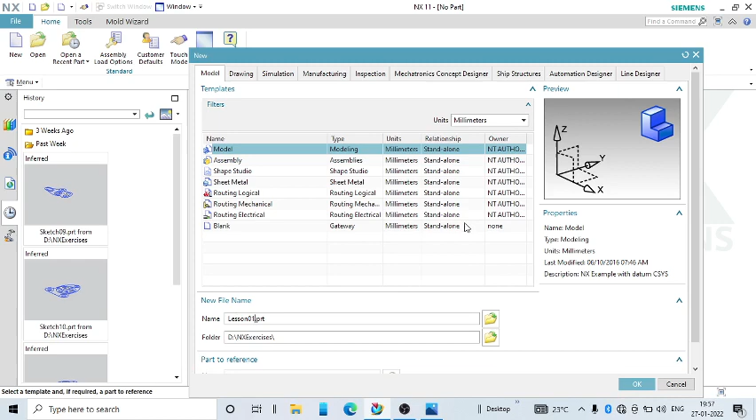Let us start. Go to new and let us save as lesson 1. Let it be there only, no problem. Then okay. So we will go like this. First, we are going to make a sketch, then select the extrude option. We can go here, sketch, and select the required plane, then okay.

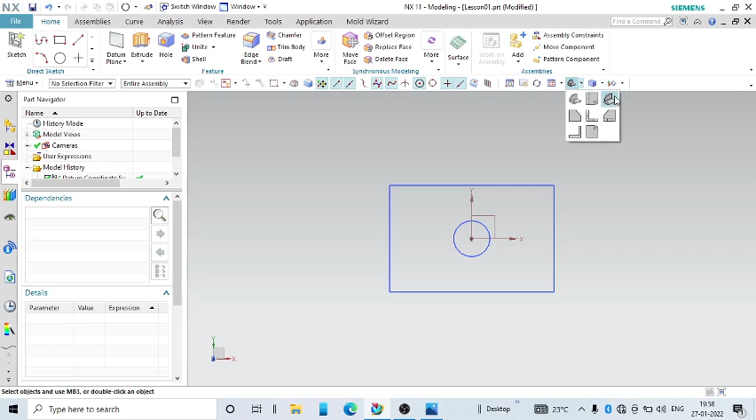Then we can make a sketch. Let us say I'm going to make a rectangle, say center rectangle, selecting the point, then drawing this rectangle. Then I want to add one more loop inside this, let us say a circle, symbol profile. Then finish sketch. So to get the trimetric or isometric view, we can select this isometric.

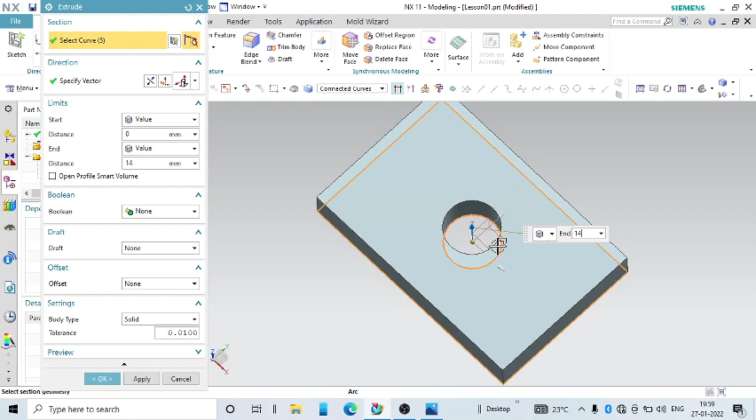The first option, you can go here, extrude, and select the loop. Let us say this particular option. You can select like this, or you can select this like this, one by one. Or you can press the control key and select this to remove, I think shift key. So we can do like this. This is one option. So I'm not going to do that.

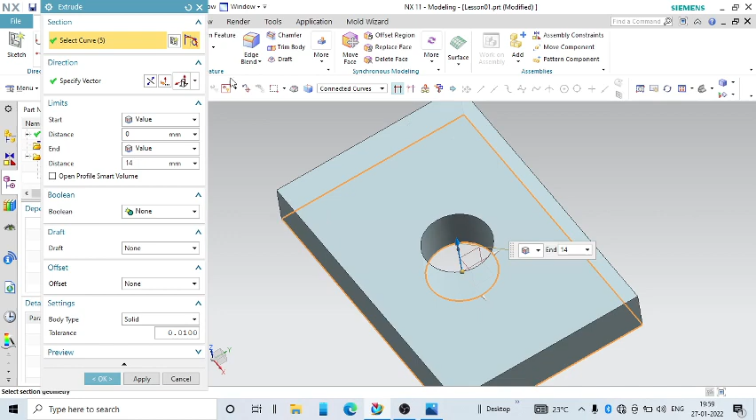Next option is you select the sketch, then go for extrude. Automatically the closed sketch, it will select the island and automatically make the profile. This is one option. Let us delete the sketch. I want to delete this. Delete.

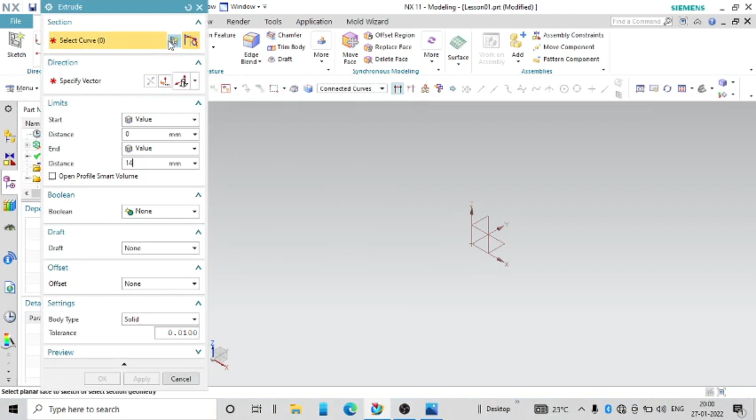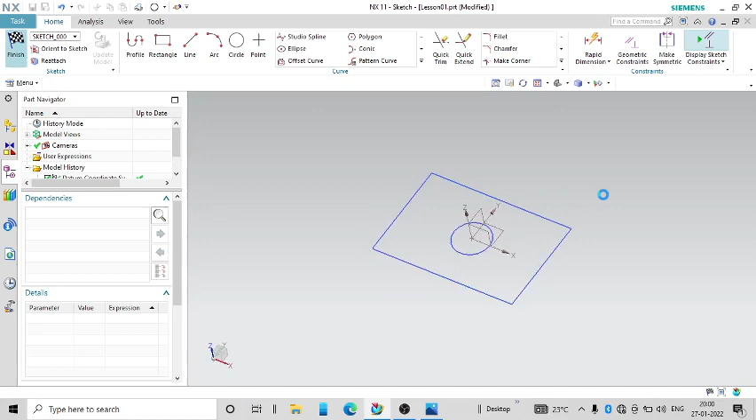Next option is you go inside the extrude command, extrude. Here, sketch section, you select the sketch section, then select the required plane, then okay. Then you make the same sketch. I am going to make the same profile, so here like this. Then okay, then finish. Automatically it is selecting like this. If you want to remove the selection, you can press the shift key and remove this, then select, or shift and select like this.

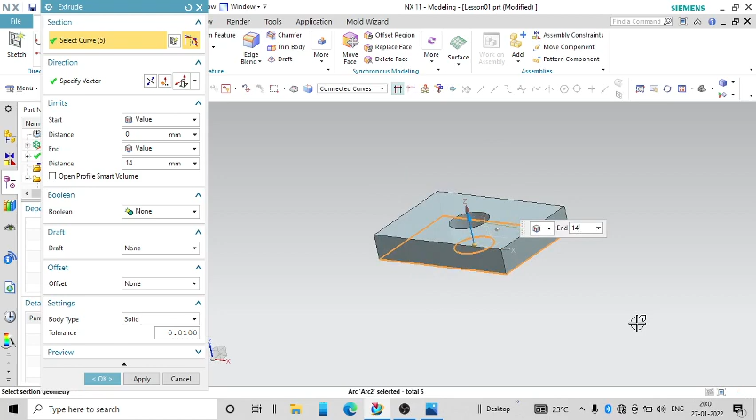So these are the three options. First of all, okay, cancel, yes. So let me delete this also.

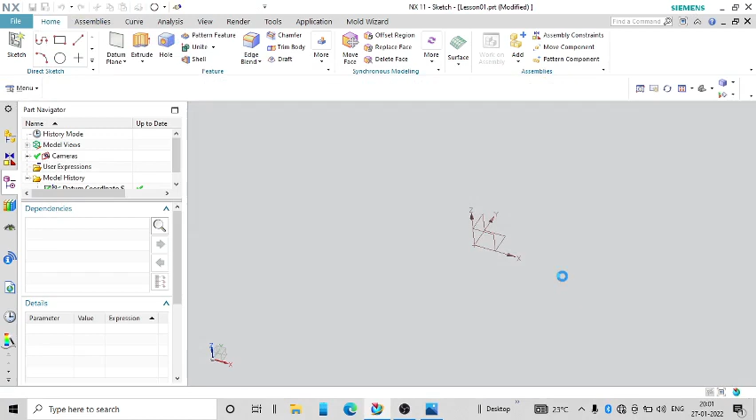Next, what we are going to do is we have to learn these limits: start value, end value, symmetric value, what it is. We have already covered the first and second. Third is in the extrude we have limits. Let us say go for extrude, sketch section, select the required plane, then OK. Then let us make the rectangle, simple rectangle here. The size is OK for us. Finish.

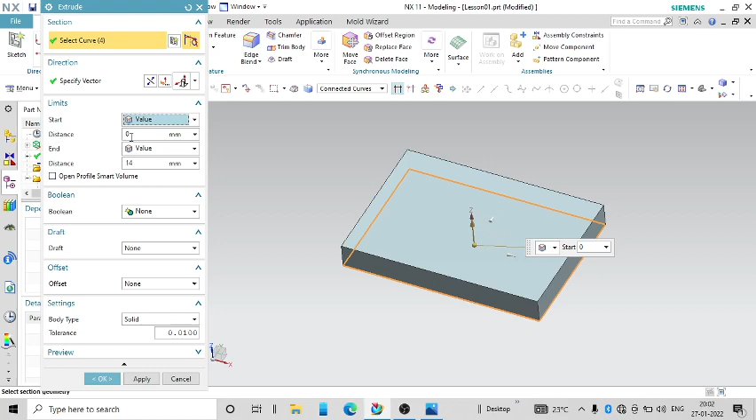Now you can see here the start value. If you check here we have value and symmetric value. First let us go for value. If I give the value, you can see start, here you have to define the distance. You can see the arrow here, so if you want to pull like this, you can change the direction. This direction is OK. Now I want to give some value here, let us say 15. So now from the sketching plane it got shifted 15 mm on the other side. To get the 15 value, I have to give a negative value here.

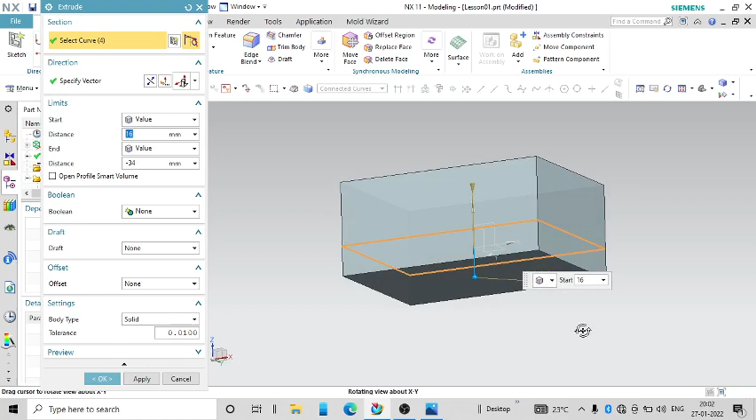Similarly, if I drag this, I can modify like this. If I pull this one back, I can do like this. You can see this value is negative now. So according to your requirement, you can modify this value. This is the start and end values. Let us say if I go for symmetric value, automatically it will maintain both sides equal, meaning from the sketching plane 12 mm here and 12 mm here. Okay.

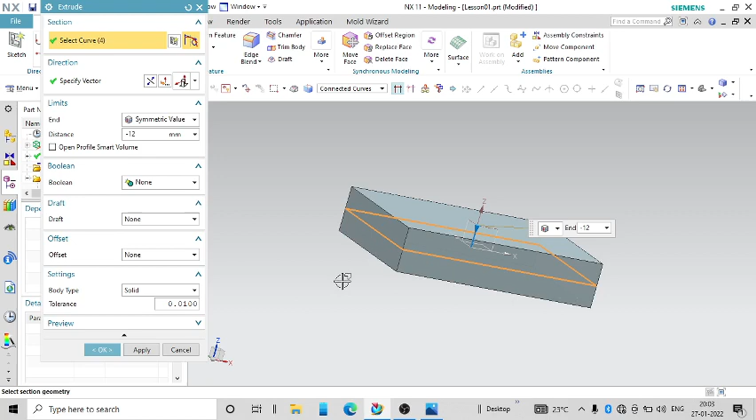Now that part is over. So if I go for the 'again' value, I can change it for the next exercise. I want to change this a little bit. Let's say 20, let's say like this.

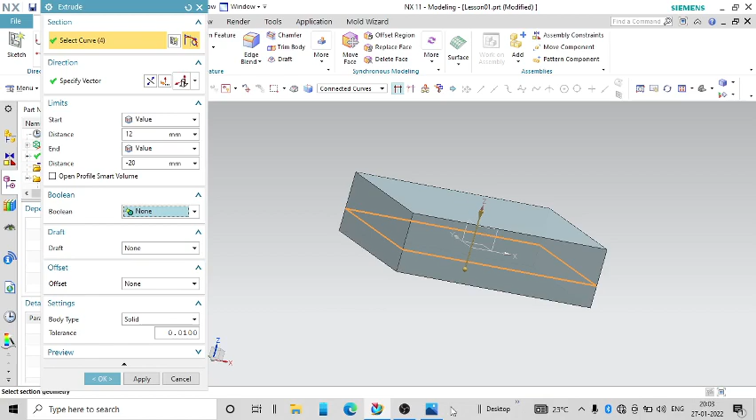Now, Boolean operation I am not going into because here there is not much use for this Boolean. Next thing, let us go here. So limits we have seen: start value, symmetric value, end value. Symmetric value is for giving the extrude upside and downside the same value, while start value you can give one dimension and end value another dimension.

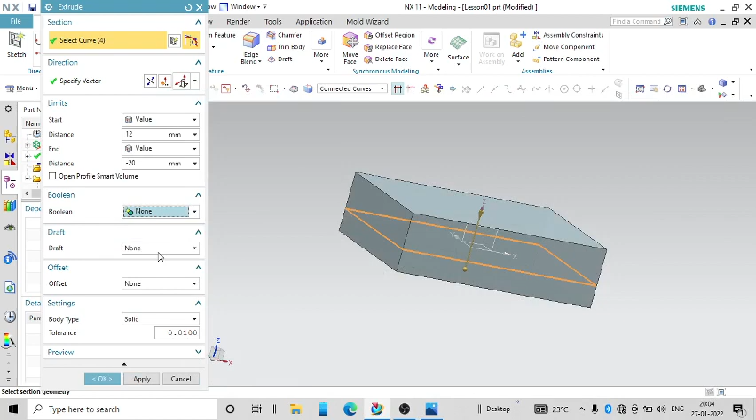Next is draft. If I go here, draft by default is none. Okay, let's say I want to give some draft here. So I can select - sorry, not here - I can select this from start limit.

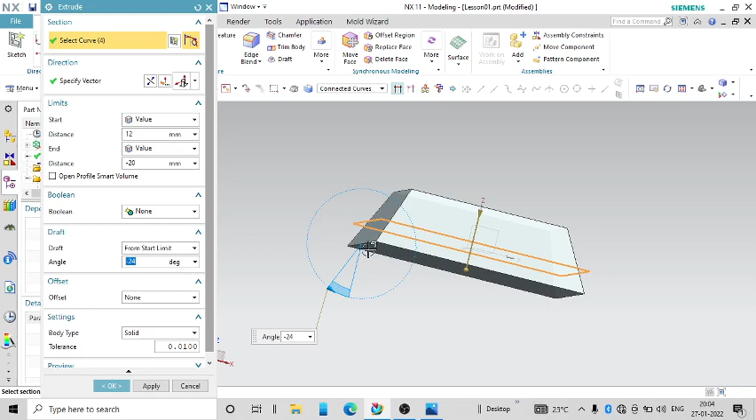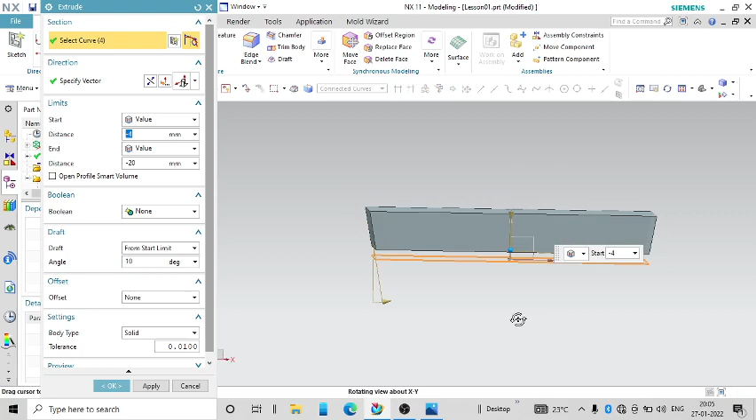From start limit means, you can see here, this is considered as the start limit. From there you can adjust the angular value to any required dimension. So wherever the profile starts, from there it will adjust. If I adjust this, let's orient it and see it from the front. You can see from this point, wherever the profile starts, from there it is maintaining the angle.

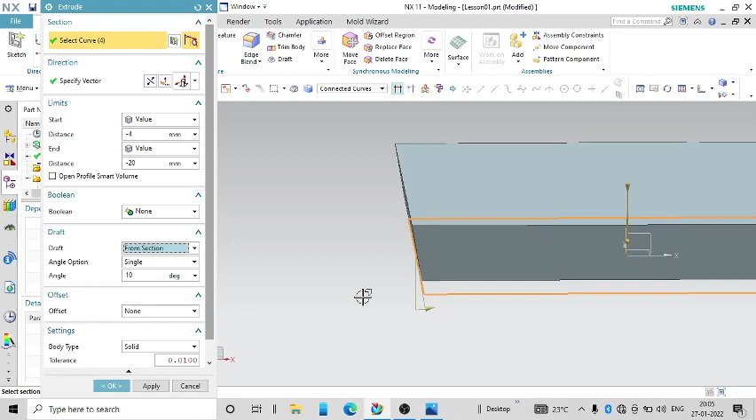That is the first one. If I change this to 'from section', what happens? Here, the sketch end is considered as the starting point, and from there it is maintaining the angle. If I drag this out, you can see again that the sketch section is considered as the starting point, and from there it is maintaining.

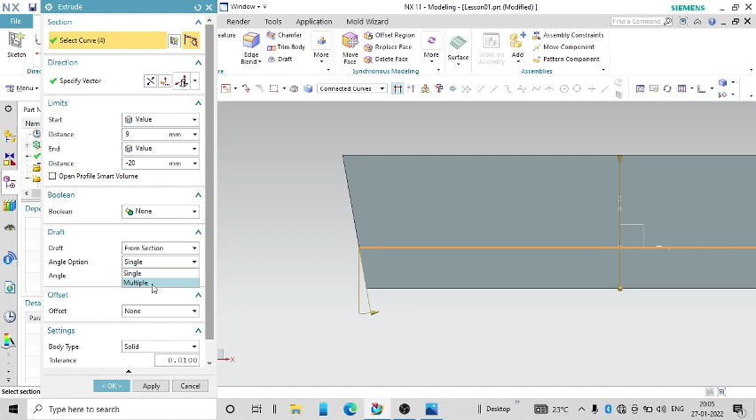Next, here I have options called single and multiple. If I select multiple, now I can define different angles. Say this face I want one angle, this face another angle, here some other angle like this, and here another angle like this. So I can give different angle values on each face.

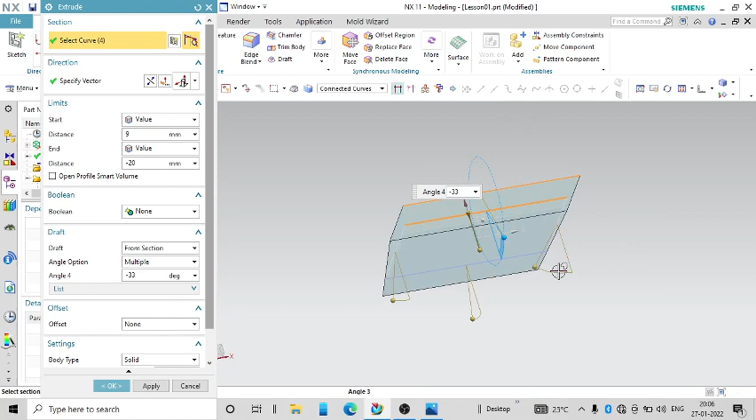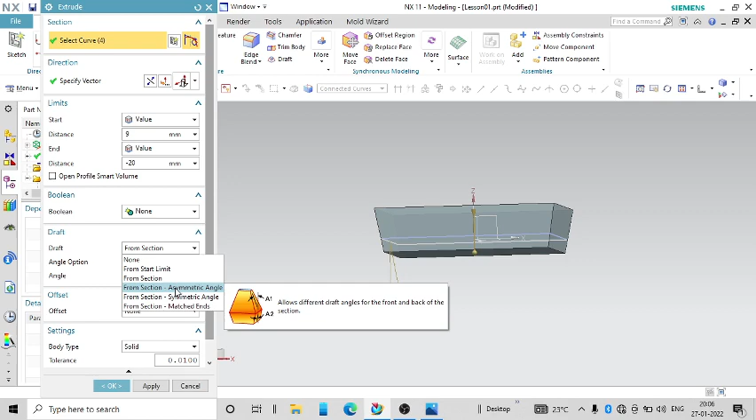This is the use of it. Please see that all the angles are starting from the section - okay, I don't want that. Let me go to single, then from 'from section' I am going to change to 'from section asymmetric angle'. What does that mean? If I go to asymmetric angle, I can give one angle on this side and another angle on this side. Remember that it is taking the sketch section as the origin point.

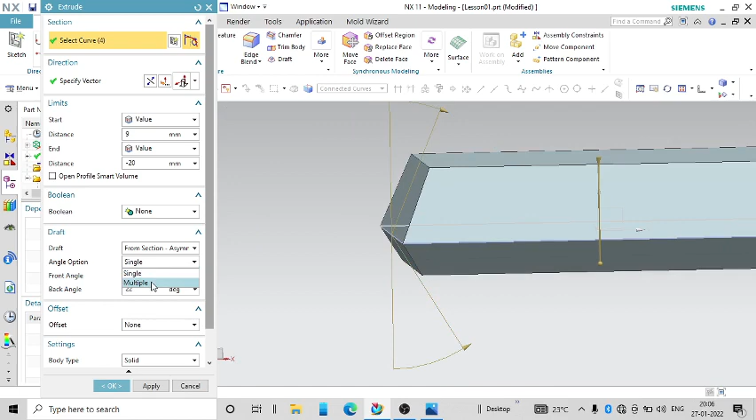Same thing I can do for multiple also. If I select multiple, you can see I can add one angle here, another angle here, and similarly on the other faces as well. So the angle can go on either side, need not be the same side, can be any side, but for the purpose of demonstration I am showing everything on one side.

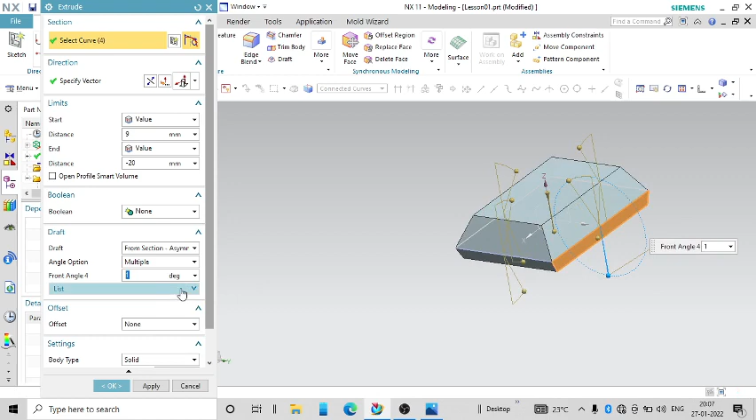So here you can see asymmetric angle and multiple. Let's see the next option, symmetric angle. Symmetric angle means only one angle you can define - whatever value you define, that will be considered as the angle value. If I give 15, it will maintain that.

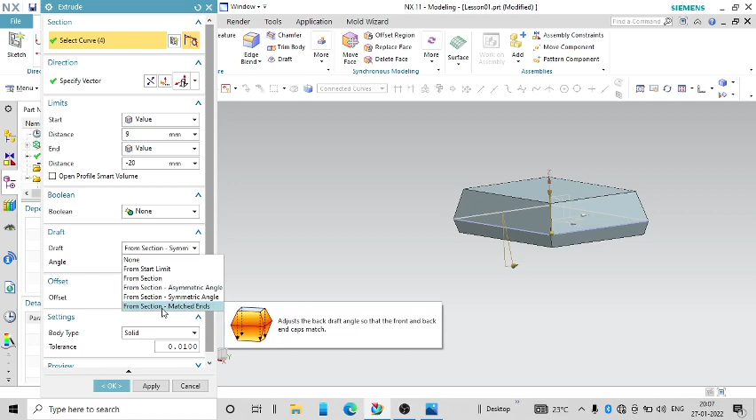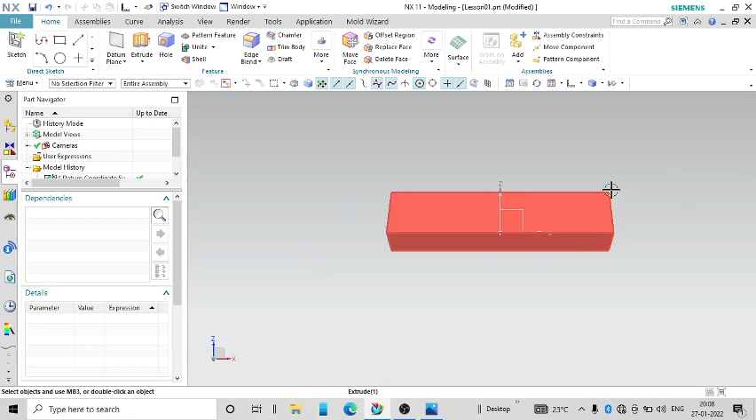Now one more option: from section matched ends. This means the top edge and the bottom edge will have the same dimension. Let me click OK. Now if I see the front view, you can see that this point and this point will lie on the same line - if I draw a line, this end point and this end point will align.

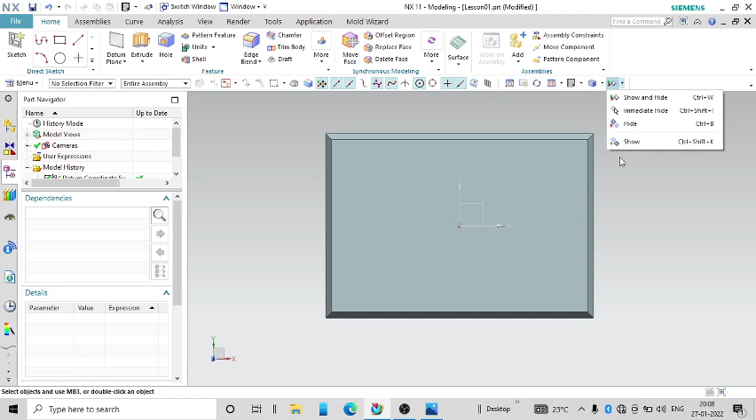Similarly on any side, if you check, it will be correct. Let's see the top view, and let's change the shading to wireframe. If I see the wireframe, I am not able to see any line outside this. Let's change the value and see what happens.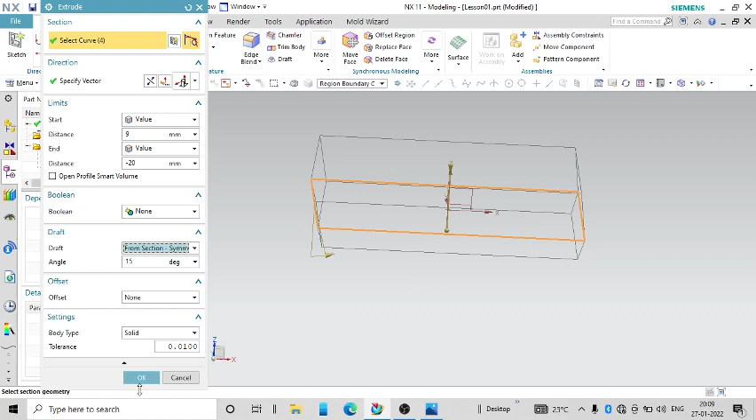Let me go here, extrude, edit parameters, and change this to symmetric angle. Let me change it and click OK. Now let's see the top view - you can see one line is passing through this edge, another one here. Similarly, if I check the front view, you can see this is far away from this corner. Okay, let's make it shaded with edges.

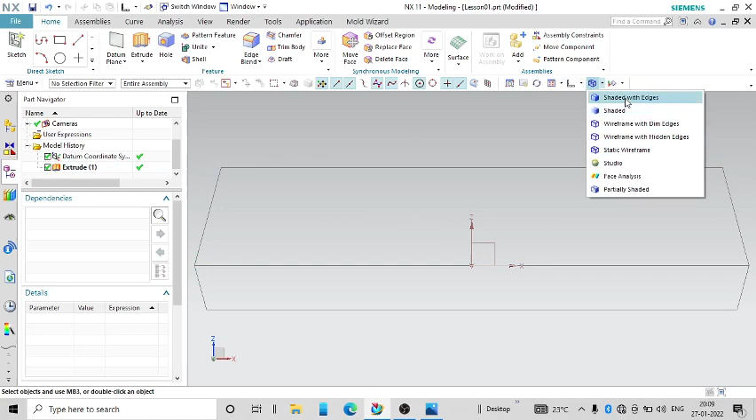So that portion is also over. Angle options, all things I have explained. Now offset - two-sided symmetric, that is also there. Let's go here, edit parameters, next offset. Okay, let's remove the angle for the time being.

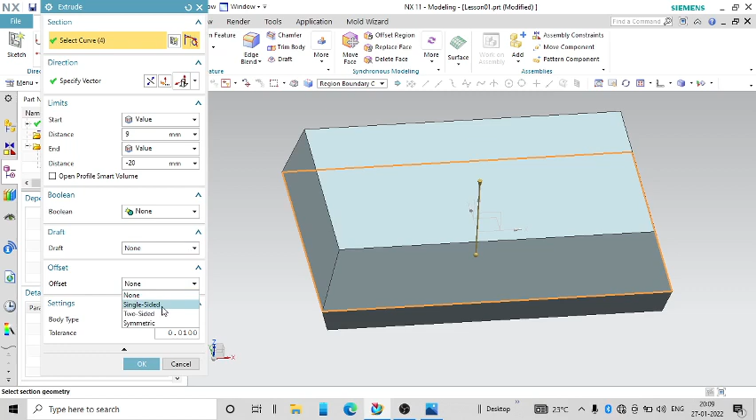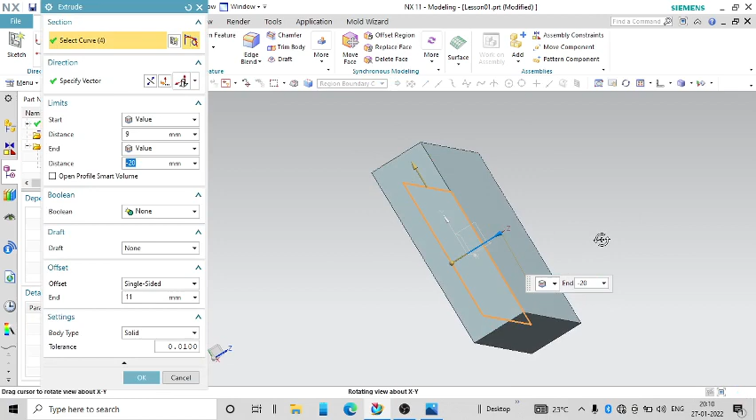Now go here, offset, single-sided. So how much value you can give here. Let us see, okay. That means your sketch is somewhere else. If you see the edit parameters, your sketch is inside. So whatever value you have given, it's okay. Now it is clear.

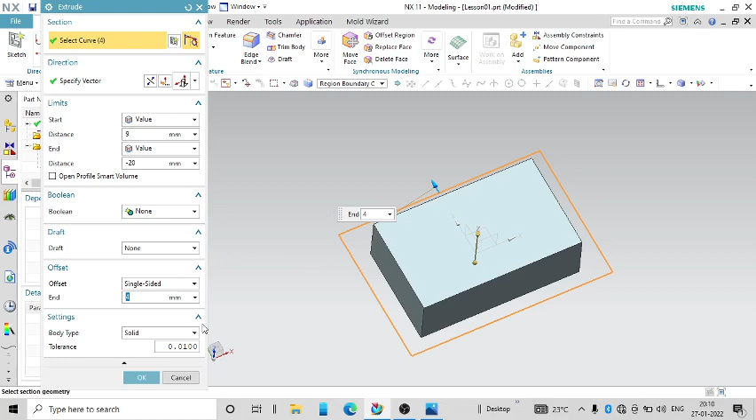So your sketch is somewhere outside, but you can adjust the profile if the value is symmetric. Now from single-sided, if I change to two-sided, I can again adjust two values, one here, another here. So you can see that.

That is the offset. Again, edit parameters. Now from two-sided, if I want to make it symmetry, that is also possible. 4 mm, here you can enter the value. So that's it.

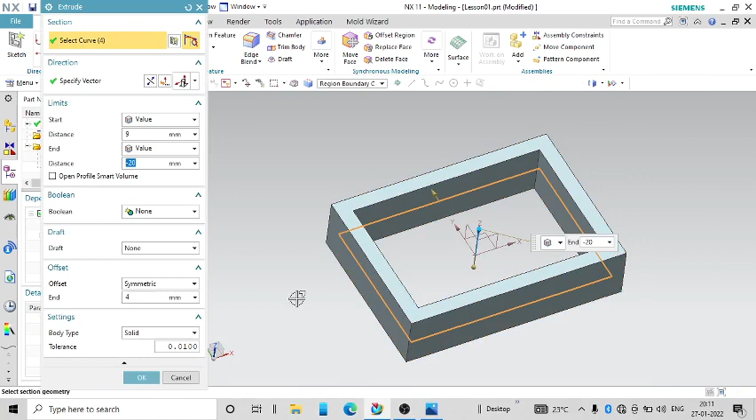Next, body type. So if I go here, edit parameters, and body type. Let us say now it is solid. If I change to sheet, okay, I will get a sheet here.

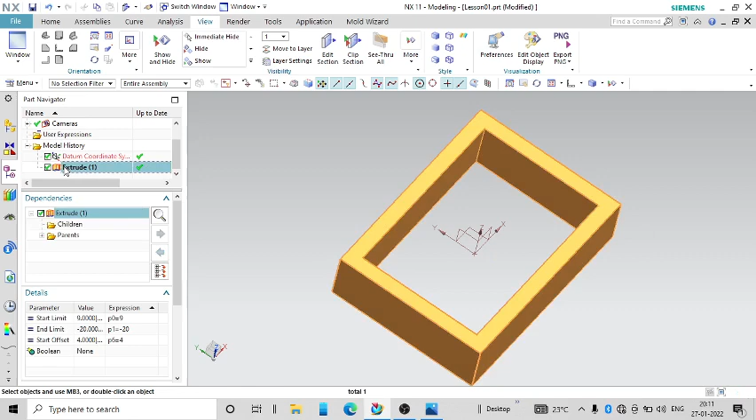So let us see how to, go here, view, edit section, and select. Oh, now this is okay. I think I need to cancel this, because this one, edit parameters. Let us offset this to none, then okay. Now you can see this is a sheet. Sheet means it is a surface.

So we have seen all these things in the sketch. We can select the required plane and make the 2D sketch. From there you have two options: one is go to the completed sketch, select the sketch, and go for the extrude command—it will calculate all the internal islands and make the extrude. The other one is you go for the extrude command and select the curve one by one.

Then next, select the extrude tool and select the plane and sketch section. Then in the extrude we have a start value, and we can define an end value or symmetric value, whatever. The other few options are not applicable now. When there is a requirement, I will explain those things.

Next is draft. You can add angles, single side or double side, from start limit, from section asymmetric angle, from section symmetric angle, from section matched ends. All these things I have explained.

Then the angle option, single and multiple, what it is. So it is applicable for one is from section and one is for asymmetric angle.

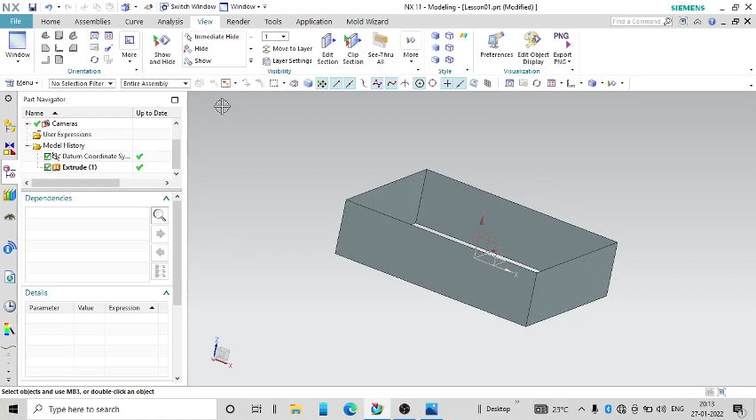Let us delete this and see that also. So let me undo this, undo. So let us delete this. Okay, delete. Now first of all I will make a vector. Okay, for that I am going for sketch.

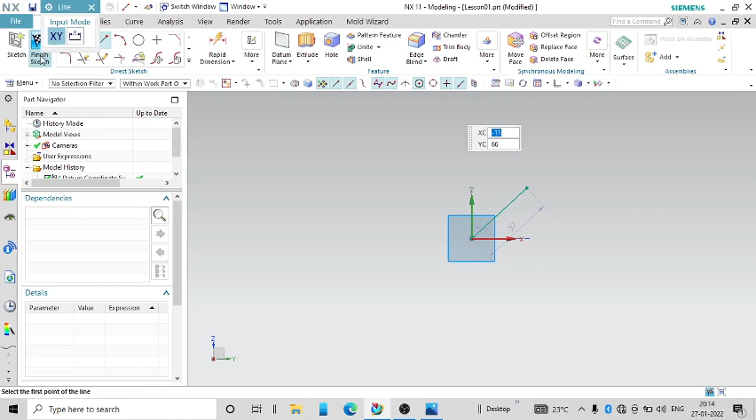So here, okay. So to show that I will draw an angular line. Let it be whatever may be the angle, no problem. Finish sketch. So this is the vector. Now what I will do, I will go for section sketch. So I am going to create a sketch here. Same rectangle I will make. Okay, let it be the sketch, then finish sketch.

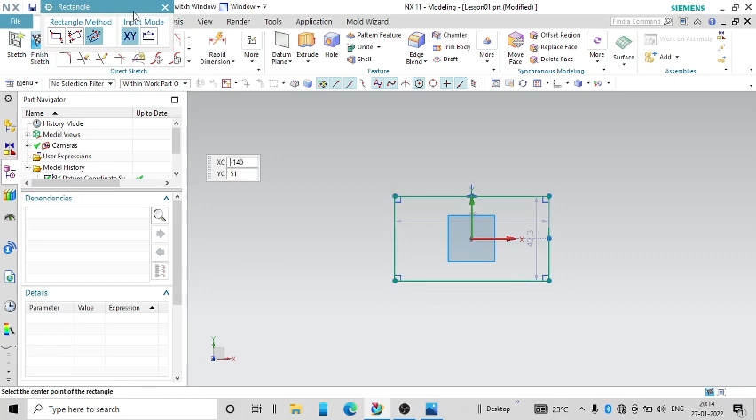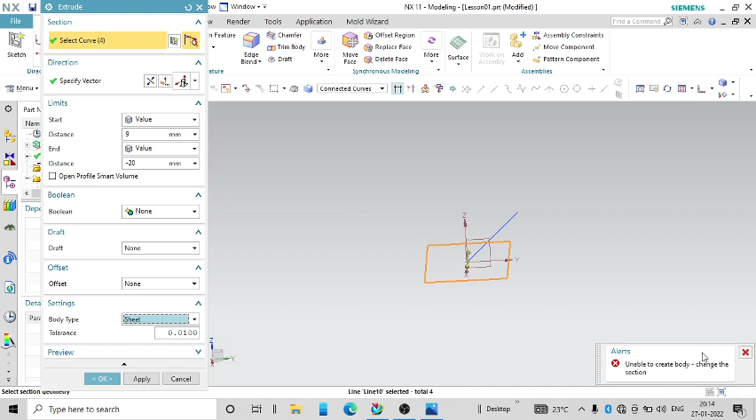Now you can see here there is a line. So what I am going to do, I am going to extrude. This time I am going to convert into sheet. Okay, then first I will select the vector, this vector, and now I will select this curve. Unable to create, I think the angle is more.

Let us cancel it. So this I want to edit a little bit. Let us make it like this. Okay, finish sketch. Now let us go for extrude, then go for sheet, then specify vector, this vector, then this curve. Change the section.

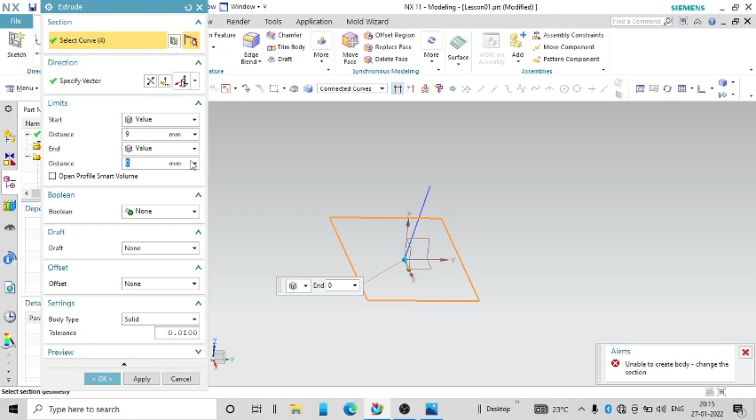Let me change to solid. Still it is something not right. Okay, let me change this 0 and 9. Now also it is okay.

Change the section. Let us see once again. Extrude, select this, so I will change this to 0. Then specify vector, this direction. Unable to create body, change the section. Okay, I will check open profile smart volume.

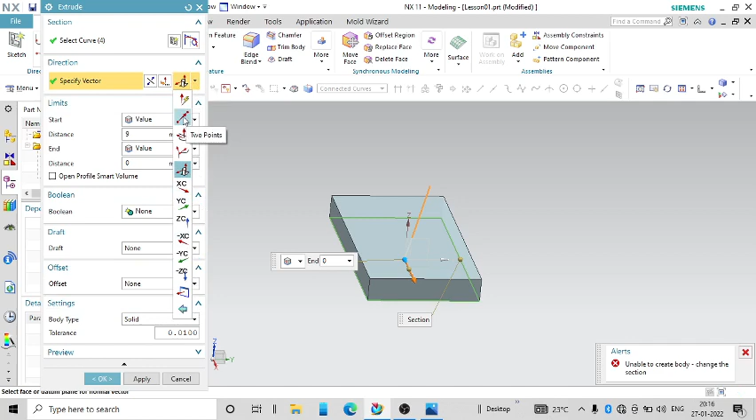So I think let us say point and direction, 2 points. So this point and this point. Now it is working. Okay, right, cancel.

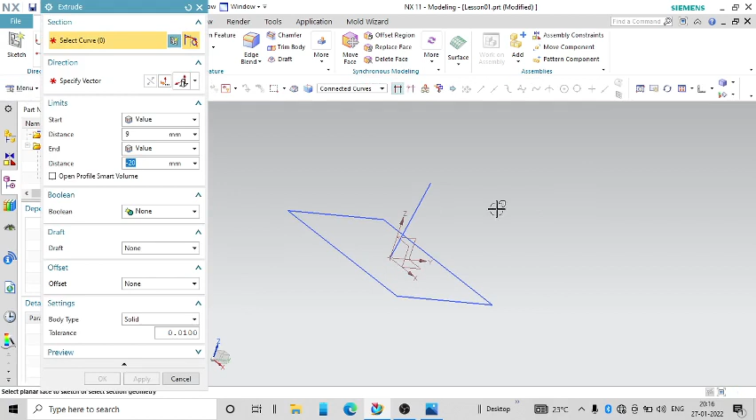So now you can do like this. Go for extrude, then select the profile, this profile. Now we will go for 2 points, one this point and let us say the middle point. Now you can see the extrude is happening at a predefined angle.

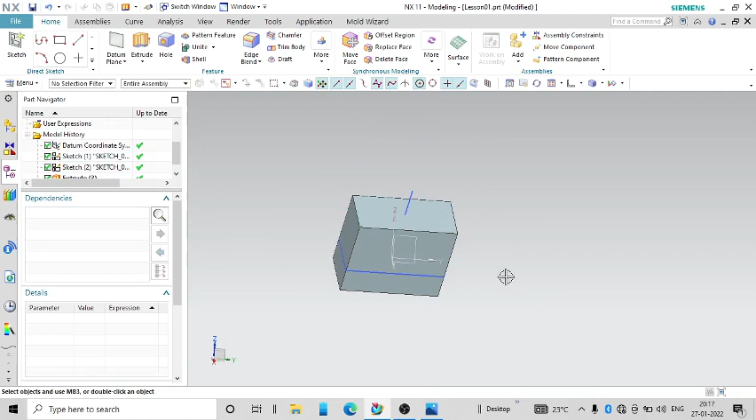So that is also possible. So that's all for this particular exercise. Boolean operation we will see in the next session. Okay, thanks for watching. Thank you.